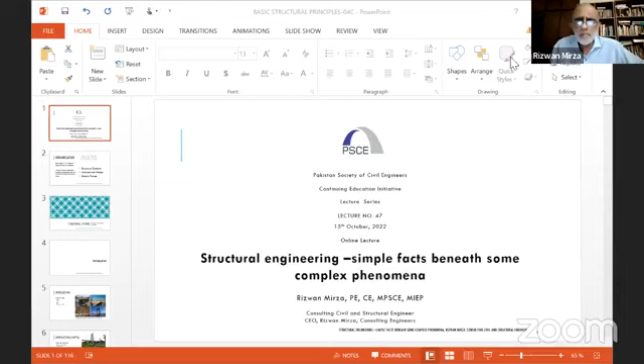Thank you. Can you see the screen? Gigi is okay. Please go ahead. Okay.

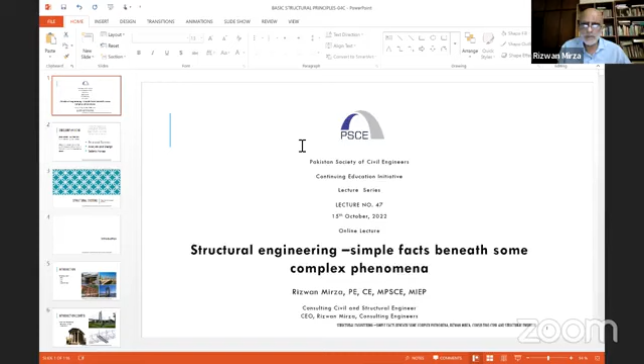I have very little time at my disposal. So without much ado, I'll start right away with what I have to present today. My presentation comprises some cherry picking that I have made from amongst the various aspects of structural engineering that are experienced by anybody who's in practice. I've tried to divide my presentation into three broad sections. One comprises structural systems. This is a separate heading so that we can view the major structural systems as a whole and try to classify them on a rational basis.

Second part comprises individual topics, but I think interesting topics that are encountered in analysis and design of various types of structures. And the third part, again, equally substantial in its length, comprises the seismic forces. I have included seismic forces because the area of seismic forces is rather hazy for most of the people. So I have tried to approach the apparently difficult subject with an attempt to simplify what underlies an apparent complexity.

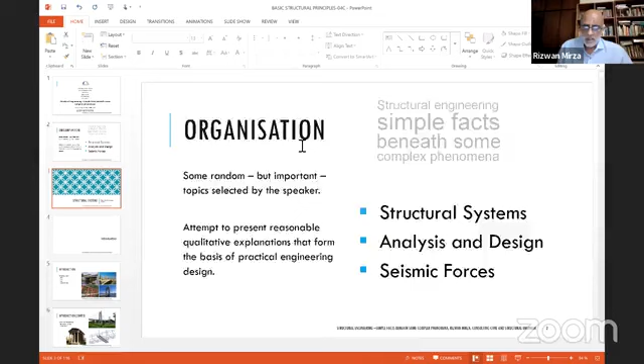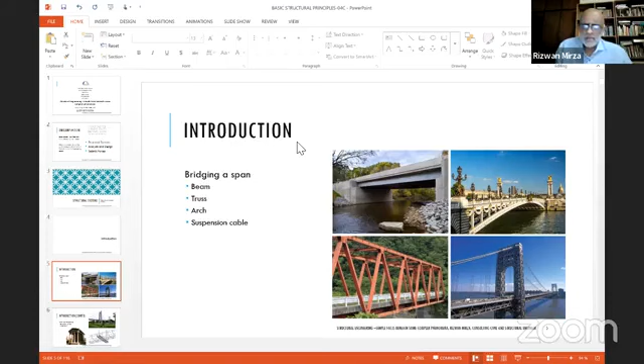So my first topic is structural systems. As we all know, we are aware of beams, trusses, arches, suspension cables, and compression members and straight cables, but we don't tend to find any unifying lines between these structural systems. We study them one by one and one at a time, forgetting that there is a common thread that connects all of them. So my attempt today would be to find that common thread.

Let's look at beams. Assuming a simple beam having two supports under a uniform load, it would have a bending moment which is equal to WL squared divided by 8 at the middle. This is resisted by tension at the bottom and compression at the top. As you would note on the right-hand sketch, the blue part that I have removed and put at the top is not being utilized fully. As the strain diagram and stress diagram show, this area is under very low stress. This is a problem that is associated with the phenomenon of bending.

So you will often see that sometimes in reinforced concrete, and more often than not in steel structures, we have rather long webs and thick and wide flanges at the top and at the bottom. This is an effort to place the material farthest away from the neutral axis so that it is most effectively utilized. Now let's move to the left. Look at the truss, which is under a similar condition. Truss is also subjected to the same load W, having the same span L, and it also has a bending moment equal to WL squared by 8.

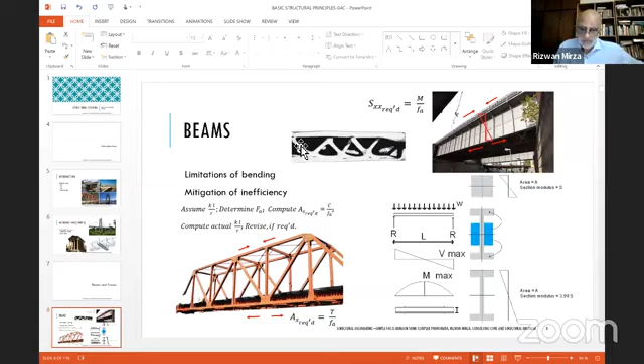Let's look at the arches. Arches are again subjected to the same bending moment, having the same span L and subjected to the same load W. The bending moment would be WL squared by 8. But what differentiates the arches from the beams is its curvature. But the curvature alone is not enough to differentiate the arch in its behavior from that of a beam, because in order to resist the bending, it will have to develop compression at the top and tension at the bottom, so that we cannot get rid of the inefficient phenomenon of bending.

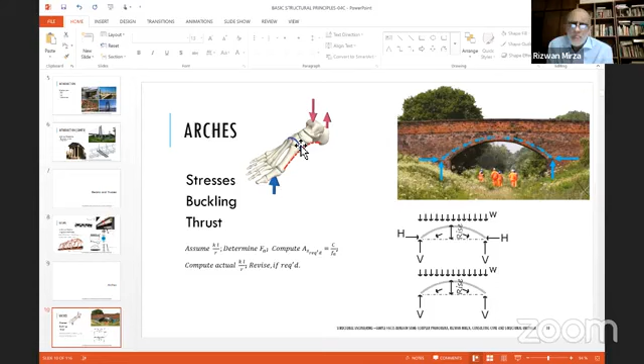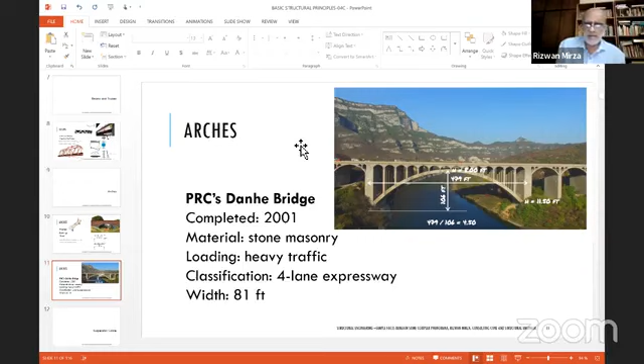It has a width of 4 lanes, which is 81 feet for this bridge. The thickness of the arch is 8 feet at the crown. It was completed in 2001. This is in stone masonry. Let's go to the next slide and see what happens when we reverse the arch.

Kindly try to retain the images of the earlier slides as we move to the next, because all these structural systems have a common thread, which I'm continuously pointing out, which is a span L and a bending moment WL squared by 8. This suspension bridge again has a span L and has to resist the bending moment WL squared by 8. But as we know, it cannot, because it comprises a cable.

So what happens is that, as the arch developed a resistance H at the springing, the bridge develops a tension T at the top, which is multiplied by the dip of the bridge. As we talked about the rise of the arch, in the case of the bridge we will talk about the dip. The vertical distance from the height of the tower to the deck would be the dip.

So horizontal force multiplied by the dip would be subtracted from the equation of the bending moment. So bending moment will be that in the equivalent simply supported beam minus T into the dip, which will be 0. In this case, it will be 0, whether you predetermine a shape of the suspension cable or you don't, because you cannot predetermine the shape of the cable. It will assume its shape according to the type of load that it is subjected to.

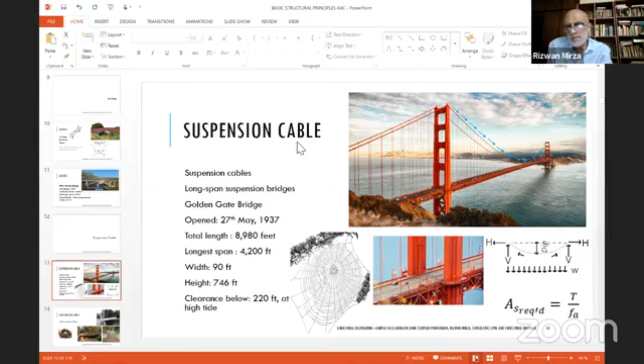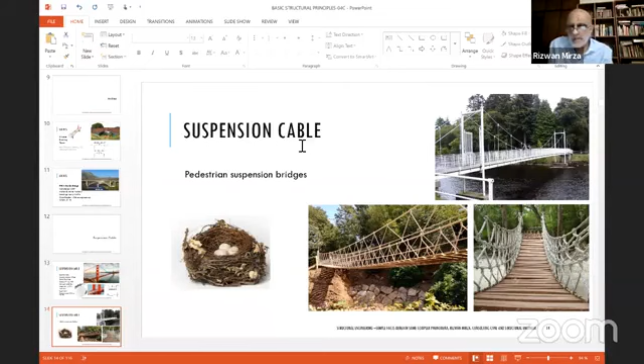This is an interesting aspect of the suspension bridge, and it shows you how efficient these bridges are. The bridge at the bottom comprises natural materials. The rope that has been used is natural fiber. This bridge is 108 feet long.

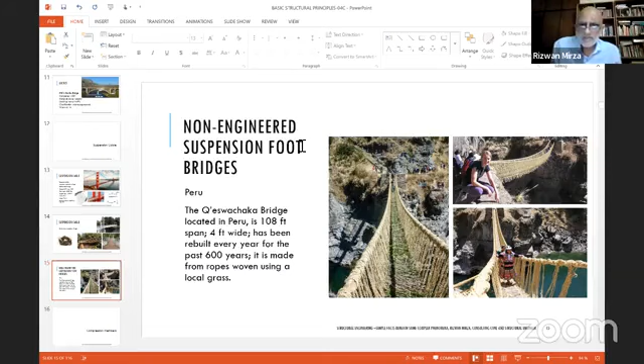It is in Peru, in South America, and the people of this civilization have been living here for 600 years, and every year they remove this bridge and reconstruct it, and it has never had a reported failure. It's just 4 feet wide. It's used for walking, and women weave the rope and men construct this bridge. This is just an example of how efficient it is. You can't have a rigid bridge over a 108 feet long span.

Now come to compression members. They pose their own difficulties, and this is a class of their own.

I will not talk about compression members because there is no such thing as compression members. I will talk about beam columns, because pure columns would seldom exist and pure beams will seldom exist.

Even in frames, the beams are carrying some tension or some compression, and even in columns, there is some inherent crookedness or inherent eccentricity, or that imposed by the connecting members, and the structure undergoes some bending.

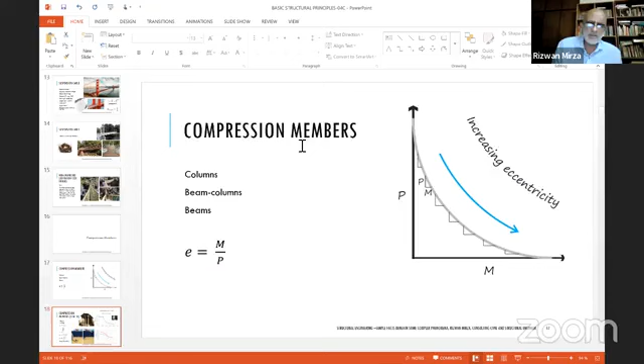Leonhard Euler was the first person who identified the difficulty associated with columns.

My teacher who taught me this concept is sitting here, I have the honor that he's sitting here. This is a great honor for me. I learned this formula, this relationship from him.

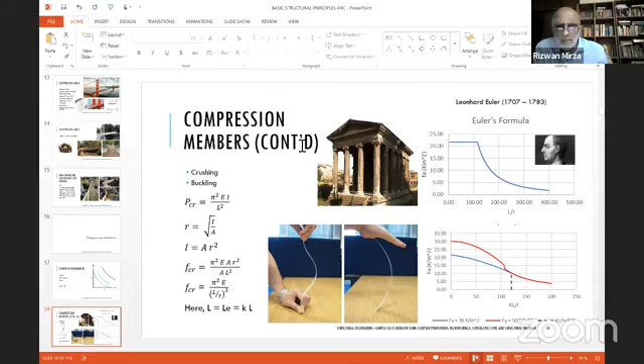It's just a ratio. Compression members, if you follow nature, look at the bamboo stem, it is hollow and it has septums. Look at the avian wing bone, which is cellular in section, and has a crisscross of septums.

Those not currently in the practice of design should know that we cannot indefinitely thin out the member by recklessly increasing the diameter while thinning the wall thickness, because that would result in web crippling. Think of a drinks can - if you compress it, the thin walls would buckle, even though they have a lot of moment of inertia. So a D over T value around 10 to 12, or even slightly larger, would be good, but a D over T of say 20 would be very dangerous and probably not permitted. There's a limit to what you can achieve.

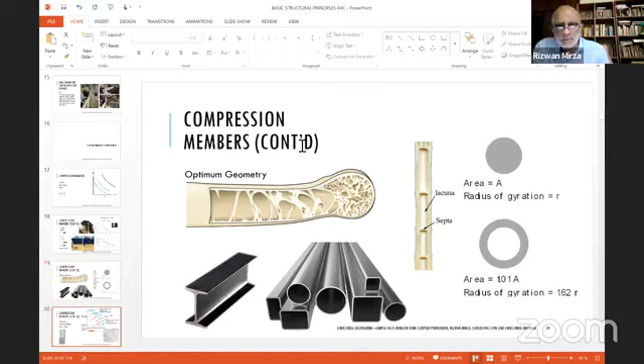At the left bottom, you can see the assortment of commercially available steel structure sections which are used in compression.

This is a reinforced concrete member subjected to bending and axial compression, and you treat bending and axial compression as pairs, entering the diagram. On the vertical axis, you touch the diagram at the load you need to carry, go horizontally, touch the interaction diagram, move downwards - this is the maximum load permitted, and this is the bending moment permitted as a maximum to be applied to the member.

This interaction diagram represents a particular geometry, particular concrete strength, particular steel strength, and particular amount and arrangement of reinforcement. Generally, available books would have 8 diagrams for 1%, 2%, up to 8% amount of steel, and then various families of diagrams for various arrangements of steel.

On the basis of those non-dimensional diagrams, you have the facility of computing or estimating the required amount of steel very speedily. In modern days, people would probably prefer digital computation to come up with the amount of reinforcement. But I would strongly recommend that even if you use digital computation, keep an eye on where your point of P and M is located within the diagram. It's very important - a blind OK signal from the software could be very misleading.

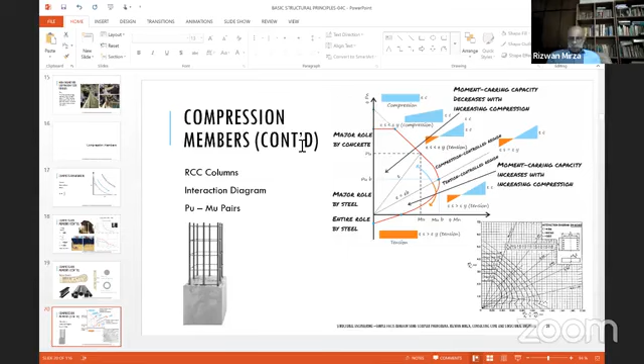The top part basically relates to lower story columns in a multi-storied building. The bottom part relates to the top storied columns, subjected to small amounts of axial load and large amounts of moments, while those at the bottom would be subjected to high axial load and low bending moment, or at worst the same amount. So the level of margin you have, and the kind of failure you should expect, needs to be examined by looking at the position of your load pair within the diagram.

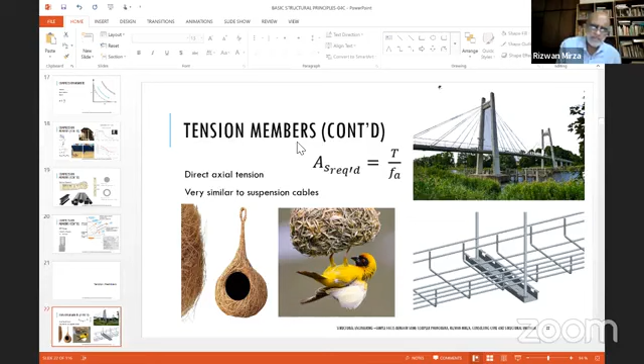Tension members, as seen at the right in this cable stayed bridge, are very efficient, same as suspension bridges. Load divided by allowable stress gives the area required. The nest of the weaver bird at the left is a tensile structure - it hangs from the stem of a tree and comprises a large number of grass pieces, sufficient for the load it is designed to carry. So even nature teaches us how to carry tensile forces by weaving from available material.

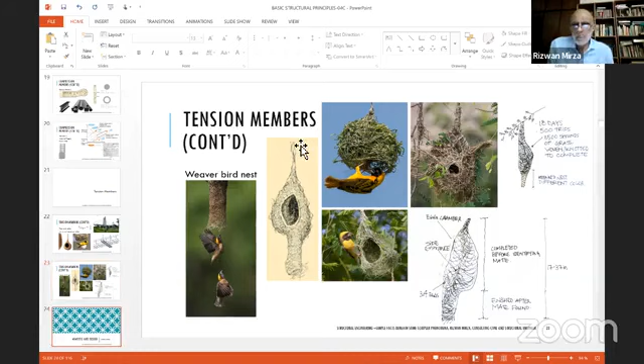Now let's go to design and analysis. I have to be quick. The stresses that we are dealing with...

Galileo was a towering personality, born in 1564 and died in 1662. The importance of that is it's the same century in which Isaac Newton was born. Galileo's importance is that he verified the Copernicus theory that the system is heliocentric, not geocentric, unlike what the church caused man to believe. This is his basic contribution, but he made many other contributions to physics, as we will later know in the topics we follow. He was really a giant.

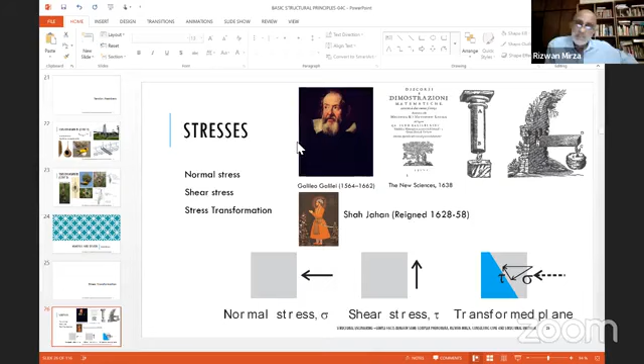As you cut various planes from a piece having a state of stress, even if that piece is a beam, notional planes, vertical, then inclined at 45 degrees, and then purely horizontal, you will see various states of stress.

This is the miraculous way by which the state of stress is determined, by the construction or by the analytical treatment of a mathematical concept which is called Mohr's circle.

It's very simple. Each point on the circle comprises a pair: normal stress and shear stress. You draw on the horizontal axis the normal stress on one plane, and on the same set of axes, you draw the normal stress and the shear stress on any plane at right angles to it. Join these two points and you hit the horizontal axis at the center of the circle.

Now draw a circle from here, and what you see is the Mohr circle. The radius is given at the top, center is given again at the left top: sigma vertical plus sigma horizontal, divided by 2, and radius is by trigonometry, very simple trigonometry. It's apparent from what you see at the diagram below.

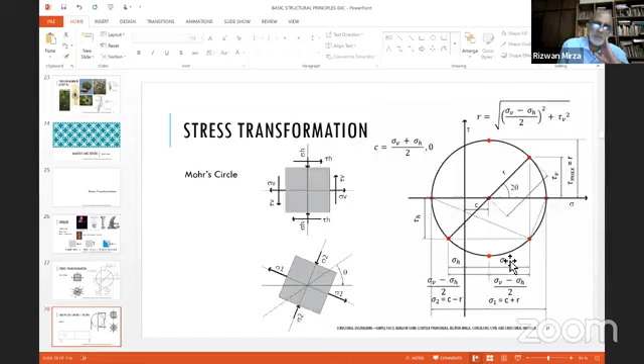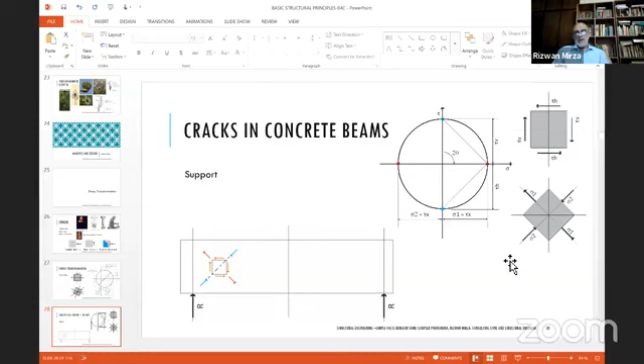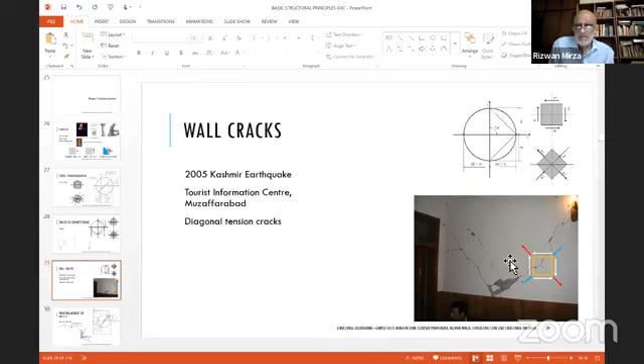Before I move forward, without taking a lot of your time, I'll just mention that this Mohr circle is such a powerful concept that it is extended even to sectional properties of materials. As you already know, you must have been taught during your undergrad studies that the bending theory is applicable only to the principal axis of members and not to axes other than the principal axis.

These are the axes which are either the maximum or the minimum value axis. Axes of symmetry are always principal axes, but not all principal axes are axes of symmetry.

And this is again the same tool that was used in determination of the stresses at various planes. So it's a very powerful mathematical device which may be employed with a great degree of facility.

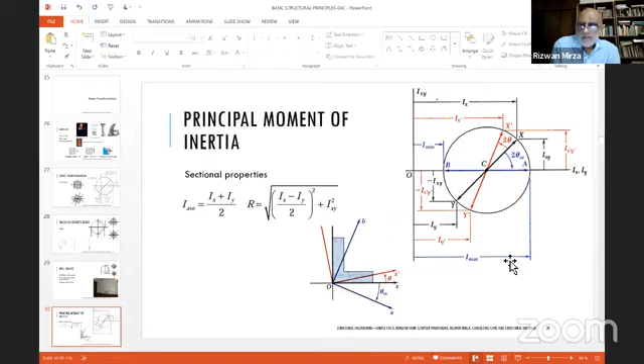And I assure all of you that you have studied things much more complex than this. Just have a careful look at the construction. The construction is very simple. It doesn't need anything other than high school mathematics. But it takes you very far when you wish to understand various phenomena that we encounter.

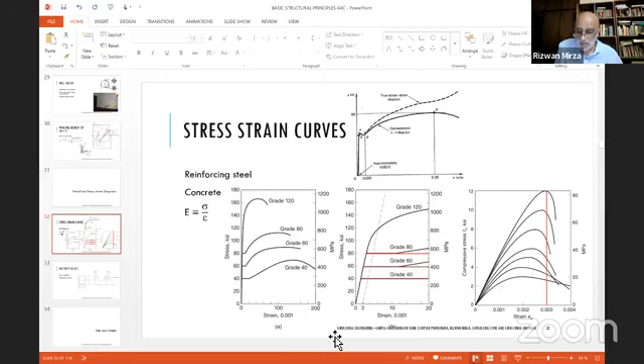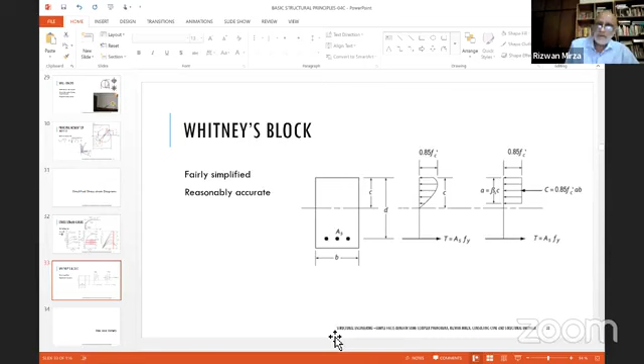Now let's go to a very interesting topic, which is risk and safety.

If anybody has a question... I'm moving fast because a lot of time was wasted at the start, and I have my lectures maybe 2 years apart. And when I meet you after such a long time, I wish to say as much as I can. And I am 65 years old now. I don't know how many lectures I can give you after this one. So I try to share whatever I can. If anybody has any question, you can stop me whenever you want.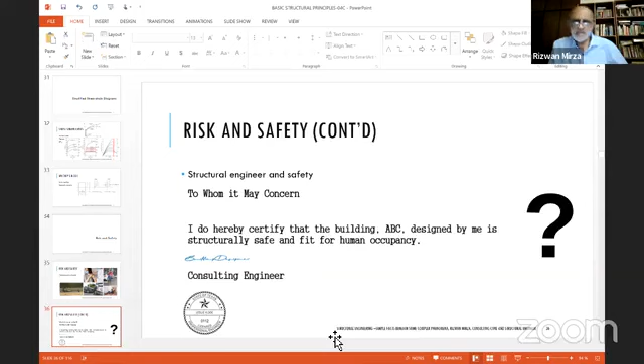I will see how we can approach safety. In fact, only in Pakistan or in countries like Pakistan are such certificates demanded by institutions like the Lahore Development Authority, DHAs, or the Capital Development Authority. Look at how nature works. The loads and the capacities are scattered around the mean, just as human intelligence is scattered around the mean.

If you have good quality control, a large number of samples are within the central part, which is the mu, the mean of the sample, and extremely high values or extremely low values are fewer. The standard deviation: the value itself minus the average value, this number squared, sigma of this divided by the number of readings, the number of samples that you have taken, and the square root of this would be the standard deviation.

The larger the standard deviation, the greater the scatter around the mean. Standard deviation has the same units as the quantity that you are measuring. For instance, if you are measuring the strength of concrete samples, it would not be very unusual to expect a standard deviation of something like 500 psi, which is commonly accepted as a usual standard deviation expected from concrete. But the lower the standard deviation, the tighter the control.

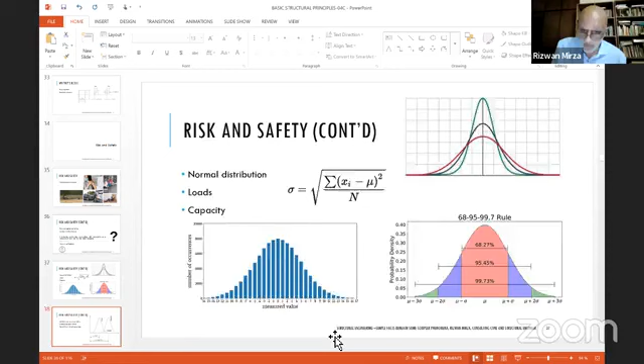With this in mind, let's go to the next diagram. I'm trying to make it as simple for you as possible. Try to understand it. If the load increases in its value, the probability is very low beyond a certain value. And if the capacity reduces to a value below this value, although the probability is low, there will be failure.

So anybody who signs a certificate that I certify that the structure is safe for human occupancy is signing an incorrect certificate, because this interface between the maximum load exceeding the minimum, the left tail of the capacity diagram, shows that as the two diagrams are asymptotic, they meet the horizontal axis at infinity; they are never zero. And no matter what you do, the probability of failure is never zero.

You can have a very large value of capacity. The probability of failure would be reduced. But still, theoretically, as the diagram is asymptotic, it will not become zero.

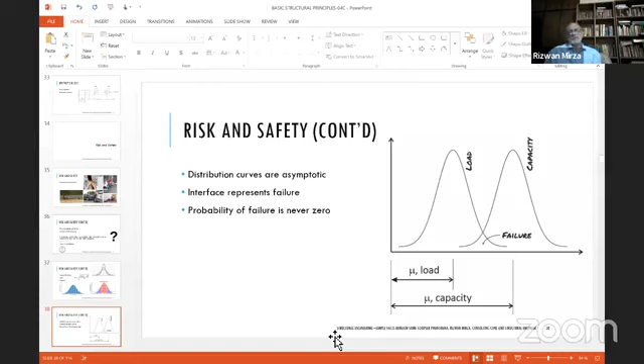Now, there is another type of danger, which is natural hazard danger, which is wind or earthquake, and the probability density distribution of this does not have the shape that we have already seen. There, the closer to the mean, the higher the probability. In this case, the lower the intensity, the higher the probability. Small breezes and low ground vibrations are seen every day, while very large earthquakes and very severe winds are seen after many years. So this is different in its concept.

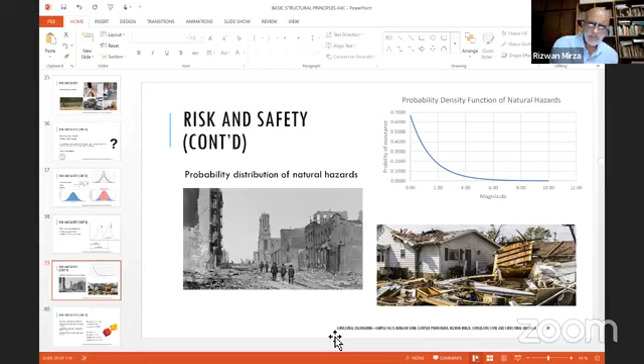Another very important concept while discussing safety and risk is that you don't combine possibilities which are unlikely to occur together. For example, dead and live load are combined together. Dead, live, and earthquake loads are combined together. Dead, live, and wind loads are combined together. But dead, live, earthquake, and wind are not combined together, which means that we don't expect the worst of earthquake and the worst of wind to come together. We don't combine the worst of wind and the worst of snow.

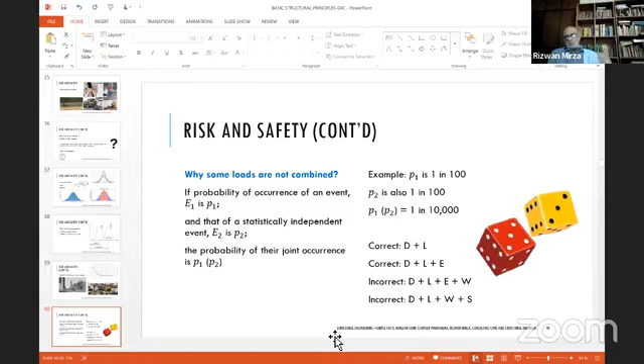Why? Just look at a small equation. If the probability of occurrence of a statistically independent event is P1, and the probability of another statistically independent event is P2, the probability of joint occurrence is P1 multiplied by P2. For instance, if P1 is 1 in 100 and P2 is 1 in 100, P1 and P2 occurring jointly is 1 in 10,000. The probability becomes so low that we disregard it. That's it.

Now look at another concept, another stray concept: whether to have continuous spans or to discontinue them. You will see both types of decisions taken in buildings and in bridges, mostly in bridges. In Pakistan, you will note that many British-era bridges are simply supported.

You reduce your bending moments when you have continuous bridges. You reduce your deflections when you have continuous bridges. You appear to have so many advantages. If you have arched bridges, the arches mutually resist the thrust of the adjoining arches, and this is a major advantage when the arches are continuous. But these are the upside of the continuity.

The downside is that in continuity, if one support settles, the bending moment diagram of the adjoining spans, or the spans next to the adjoining, would change, and a failure may take place. Secondly, unless you have designed for it, continuous spans are sensitive to pattern loading, which means that the dead load is placed there at every span. We know that. But when live load is placed at one span and not at the other, or at two spans and then not at the other, the bending moment diagram changes.

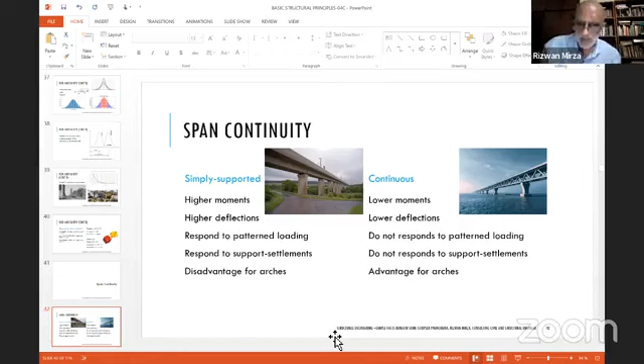Approximate analysis is a technique to which you must be introduced if you have before you a multi-story building and you need to quickly estimate the bending moments at the bottom. Just roughly compute the lateral shear of the earthquake force divided by the number of columns, with the difference that the external columns are taken as half and the internal columns are taken as one. And per column force multiplied by height divided by 2 will be the bending moment in the column.

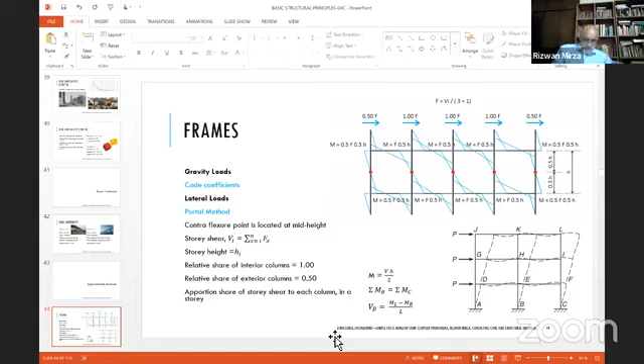This can be done in 10 minutes, while even if you have computer facility and you intend to carry out a sophisticated analysis, even trials are not possible that fast. You must have some prior estimates of the forces before you can start undertaking the trials.

So the simplification that is often made when you are in a hurry and you don't have this diagram before you is that you take 2 vertical to 1 horizontal dispersion. If you move downwards by 2, you move horizontally by 1, and in this fashion, you increase your footprint in both directions. Don't forget, in X direction and in Y direction, which means as you look at the plan in the L direction and in the B direction, you increase your footprint.

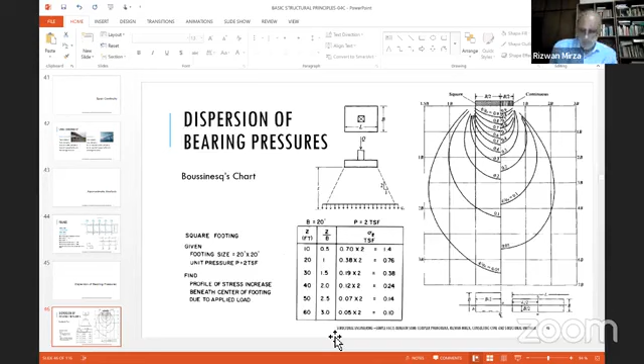You move by Z below the start of the foundation, Z by 2 on one side, Z by 2 on the other. So Z on the 2 sides put together, plus the original dimension B. Again, Z by 2 on one side and Z by 2 on the other, plus L in the other direction, which is equal to L plus Z. So it will be Z plus L multiplied by Z plus B, the footprint at a depth of Z. This will be a very large footprint, so greatly reduced contact pressure. This is one point that I wish to make.

And as you know, the settlements that you get are not a result of the actual compression of the material of the soil, but a reduction in the gaps and oozing out of the water. It's not compression of the clay particles or the sand particles that results in the settlements. So the stresses are the primary parameter that cause settlements. So the deeper the stresses, the deeper is the influence of stresses, unless it's rock, which would not move, whether the stress is 1 ton or 2 tons or 10 tons per square foot.

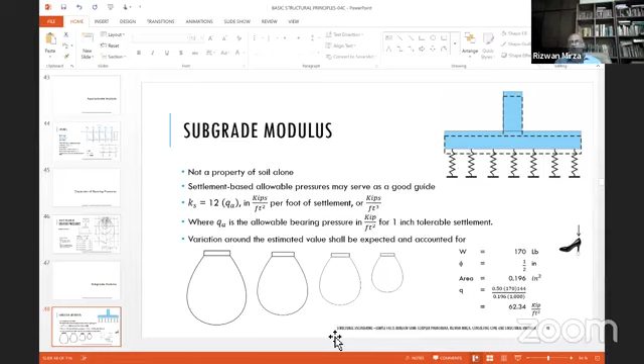And nothing happens. This is an interesting thing that I leave you with. Such large numbers are present around us, and they don't create havoc because the stresses are confined to very, very low depths, and maybe the stress generated by the human foot in this manner is confined to one stone depth alone. So nothing is going to happen to that stone under this kind of a stress.

Support fixity is my next topic. Many people ask whether the support is supposed to be fixed or it is supposed to be taken as pinned. Look at the support when you subject the support to rotation plus some sort of flexure bending moment. There is a tendency to have larger bending moments, larger pressures at the right and smaller pressures at the left. And as a result, there will be larger compression or settlement at the right and smaller compression or settlement at the left.

And it's very difficult in geotechnical engineering to compute what kind of rotation will take place, because the standard procedures that we have are tailored for uniform settlement. So the simple technique that has been proposed is that you assume Q maximum throughout the foundation as the first assumption and compute the settlement, delta 1. Then you assume Q minimum throughout the foundation and compute settlement 2. And then delta 1 minus delta 2 divided by L, tan inverse of this, would be your rotation angle. This is a rough indication.

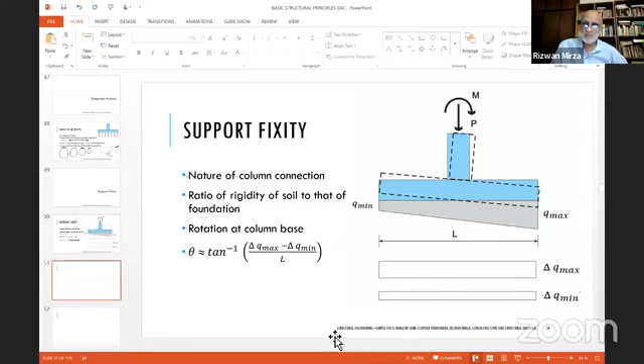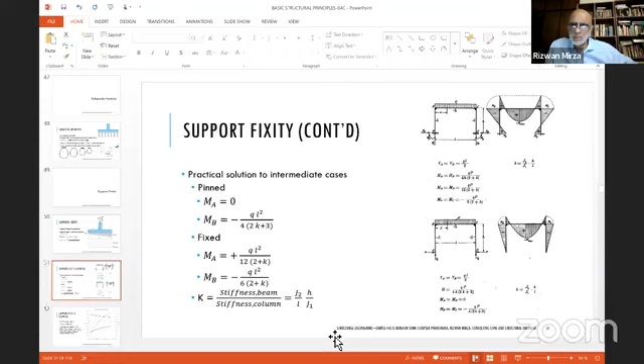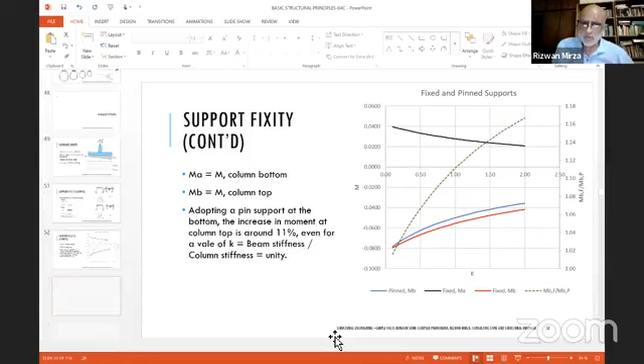If this value is large, it means when the foundation is subjected to a very large moment, be prepared for a large value of theta. In any case, I'll move fast forward from here. Even if you have exact analysis of bending moments with pinned support at the bottom and fixed support at the top, my analysis says that even when the stiffness of the beams is taken as equal to the stiffness of the columns, which is almost impossible, the difference in the answers will be only up to 11%. So in reality, it hardly matters whether you assume pinned or fixed supports.

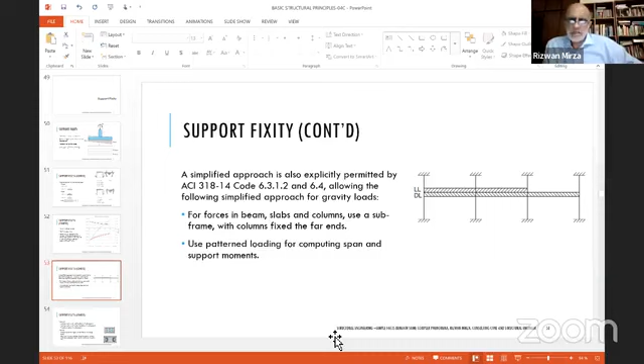The American Concrete Institute allows you to use subframes for your analysis, fixed at the top, fixed at the bottom. Again, fixity at the bottom is allowed even by ACI. Lastly, if you have rigid connections, which means connections have the ability to rigidly transfer the loads, you will assume fixed supports. When you have rigid connections but the foundations are flexible and have a tendency to rotate, you have to assume pinned supports. When you have hinged connections, you will have pinned supports.

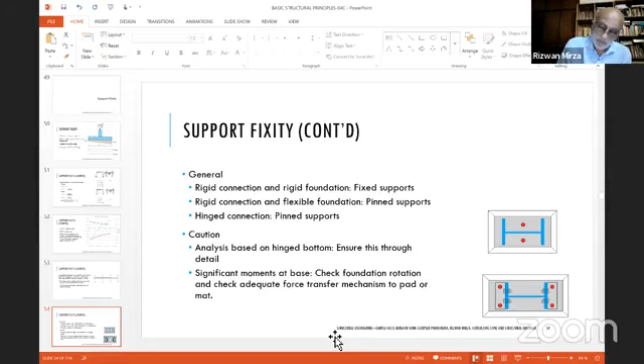See the diagram at the right. The diagram at the top has very small distance between the bolts. It will not provide any significant moment transfer between the plate and the pedestal below. While the diagram at the bottom has very large distance between the bolt lines, and it's clear that the designer has the intention of transferring a significant moment to the plates below. This is about pattern loading, and I will try to neglect it because I'm running out of time.

Okay, this is a very interesting topic. I don't want to leave without this. You must have studied simple harmonic motion. This was observed by Galileo when he had been imprisoned by the church. He was subject to house arrest, and the property of each pendulum to move to a certain extent and then come back, the time period, is the same for each pendulum. The frequency, which is 1 over T, is equal to the square root of K over M. K is the stiffness of the vertical part of the pendulum, and M is the mass attached at the bottom.

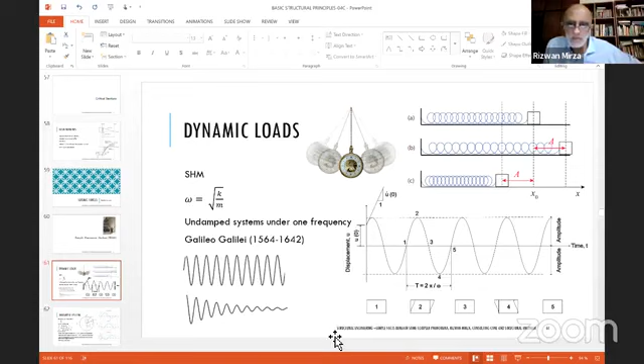Point 2, there is a movement at the right. Point 3, again mean position. Point 4, extreme opposite direction. Point 5, again at the mean position. So the building or the object, or the pendulum, moves from one extreme position to the other extreme position, passing through the mean position at points 1, 3, and 5.

Phi, you neglect phi. Phi is a useless complication. Phi is the phase shift. This means that if it had already moved by an angle, just add it. For the moment, assuming it has not already moved by any angle, you assume that phi is 0. So you take a sine theta, that is equal to the vertical

displacement, and the velocity would be equal to the first derivative of the displacement, which will be omega a into cos theta, and the acceleration would be the second derivative, that will be minus omega square a sine theta, or minus omega square x.

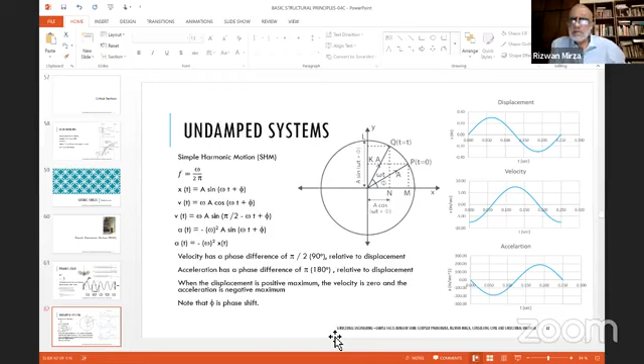And the equation that you set up is formulated by the facts that the force applied by the mass is dependent on acceleration, the force generated by the spring is dependent on the displacement, and the force exerted by the viscous damper is dependent on the velocity.

So m into a, that is mass into acceleration, plus c into velocity, plus k into displacement, since the spring is always exerting a force proportional to displacement. K is the constant that represents the stiffness of the spring. C is the similar constant for the viscous damper. And you add them up and this becomes zero for equilibrium.

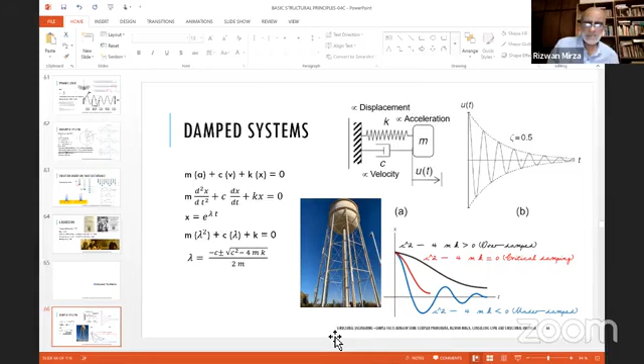How much time do we have left? Okay, 2-3 minutes more.

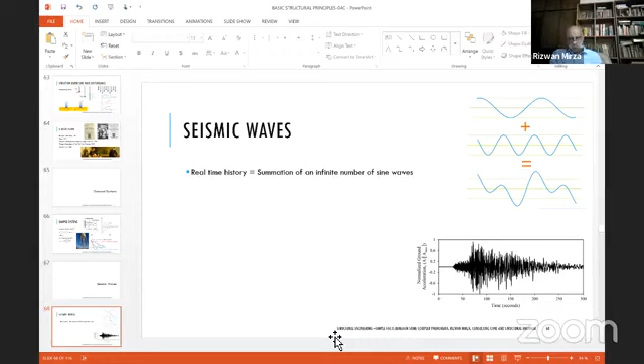There is a procedure by which you can break down such a complex wave through an infinite series into an infinite number of sinusoidal waves, an example of which has been produced above in a very simplified manner. It's a digital procedure, and you pick up those waves which have significant amplitude. Those are the waves that are the major contributors to the energy of the earthquake.

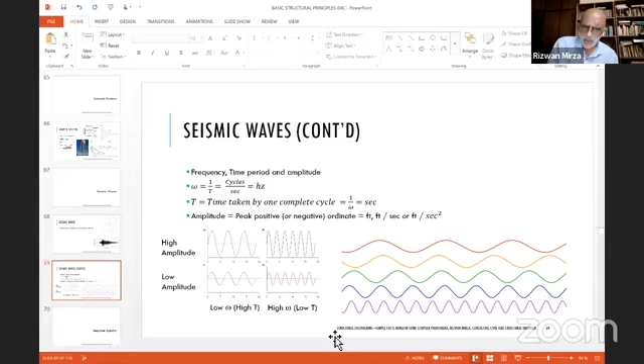And the breakdown into waves of certain frequencies and amplitudes is of vital interest.

If you have time, I will stop at one thing, unless we have questions, then I will go on and utilize the next few minutes. Do you have any questions? I think, Rizwan, you first finish your lecture, then there are 2 questions on Facebook that I will read out once you finish. Okay. Okay.

The simple concept is that there is, say, a 30-second record generated by an earthquake waveform at a particular location. Note that the waveform generated at another location will be very, very different. So you cannot say that this was a signature waveform for that particular earthquake.

So you take a pendulum having a mass m and 2% critical damping, and period is 0.5 seconds. Then you take the same pendulum, elongate the length, you get a higher period of 1 second. You take the same object, elongate the length further, and this period now becomes larger, now 2 seconds.

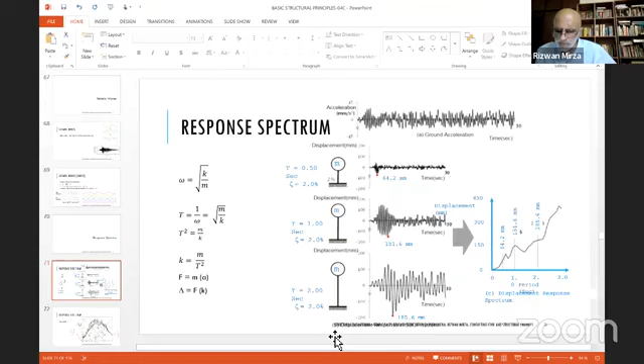You keep on increasing the period, take pendulums of different time periods, subject them to the same acceleration time history, and on the vertical scale you either plot displacement, velocity, or acceleration, because displacement is the first thing. Its dy by dx is velocity, which is the second thing, and again its d2y by dx2 is the acceleration, which is the third thing.

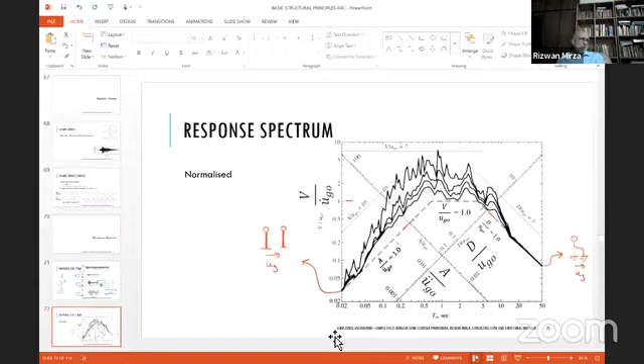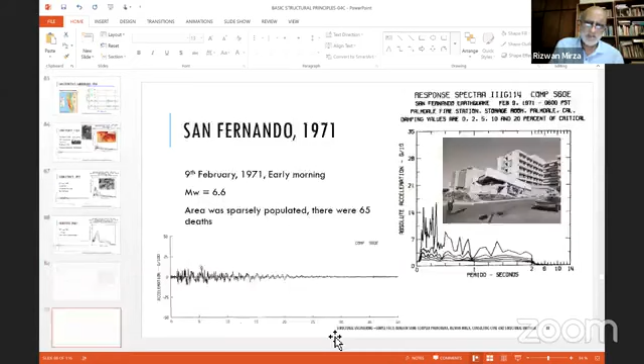And the important thing is the last thing. I will skip everything and draw your kind attention just to the last thing, which is the conclusion of what I want to say on the basis of all this.

These are the response spectra for a region, for instance, or a country, for instance. And when I superimpose them, this is a real diagram. When I superimpose them, I get a wide scatter of the diagram.

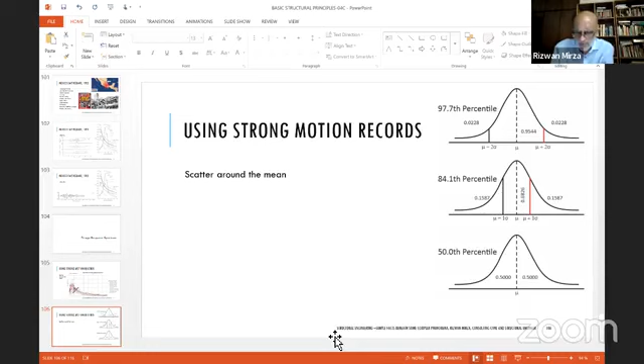Recently, for instance, Pakistan's code has been made, and as I expect, people should have access to so much record of the past and so much prediction about the future, so that they could construct such response spectra as are reasonably probable, and then see what the mean value is, and then draw a diagram which is either the 84.1th percentile or 50.0th percentile, which means 50% chances that the diagram will be exceeded, or 84% chances that the diagram would not be exceeded, and the building would become more expensive.

What you must understand is that in order to do this, we are not talking about histories of past earthquakes. We are talking about future. We are talking about potential earthquakes from the movement taking place potentially at various locations within the Indian plate and the Eurasian plate, under the interaction of which the Himalayas are moving by about 2.7 centimeters every year, going up. And a great earthquake every 300 or 400 years apart is always expected from this region. So there is a strain built up in this area.

Unless we can predict what will reach at every site in Pakistan, based on frequency content, the type of soil through which it travels, these attenuation functions, and so on and so forth, it will be a tall order, a momentous task for a committee to come up with a consensus, a sort of earthquake mapping of the country, without having access to the data that is accessible to people who are controlling the recording stations around the world.